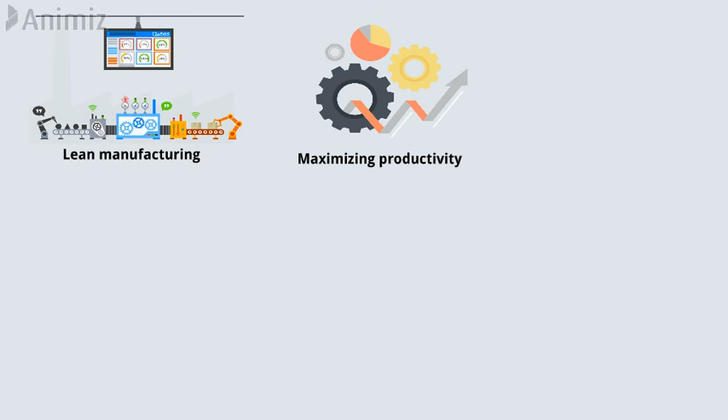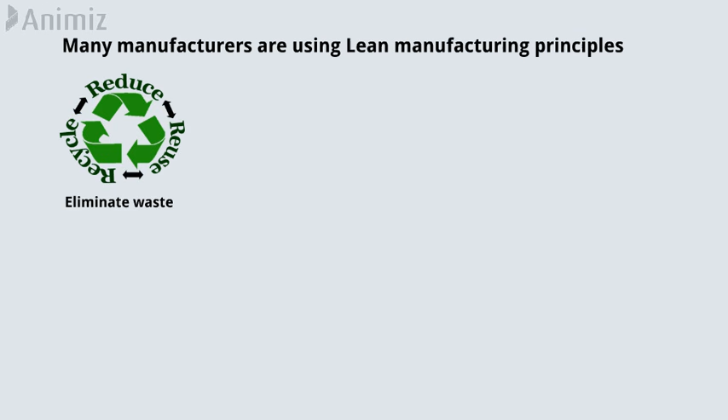Let's start the video. Lean manufacturing is a production process based on an ideology of maximizing productivity while simultaneously minimizing waste within a manufacturing operation. Many manufacturers are using lean manufacturing principles to eliminate waste, optimize processes, cut costs, boost innovation, and reduce time to sell in a fast, volatile, and ever-changing global marketplace.

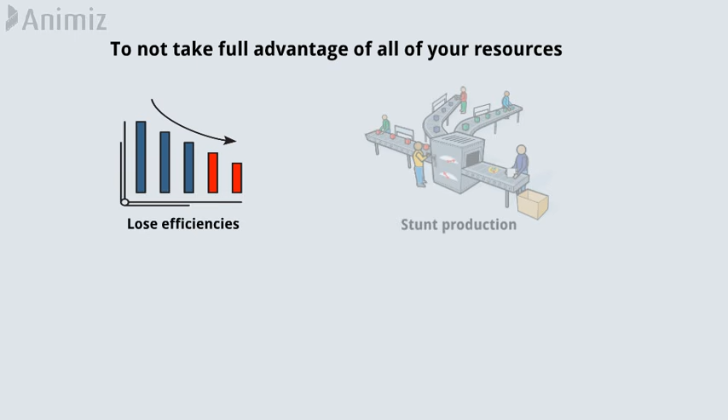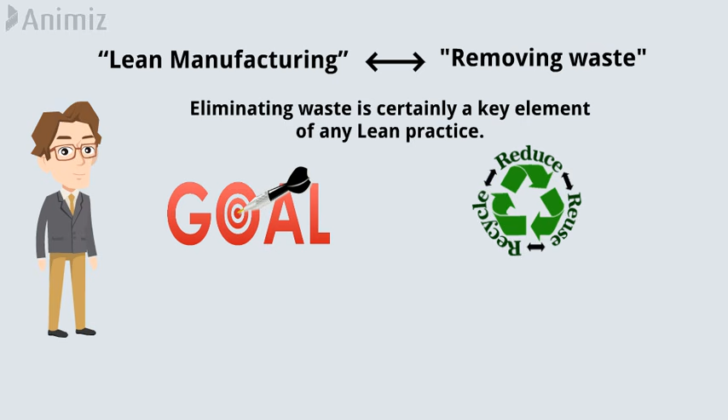To not take full advantage of all of your resources is to lose efficiencies, and in so doing, stunt production. For many people, the phrase lean manufacturing is synonymous with removing waste, and eliminating waste is certainly a key element of any lean practice. But the ultimate goal of practicing lean manufacturing isn't simply to eliminate waste, it's to sustainably deliver value to the customer.

Some well-known companies that use lean include Toyota, Intel, John Deere, and Nike, etc.

Now come to 5 principles of lean manufacturing. A widely referenced book, Lean Thinking, Banish Waste and Create Wealth in Your Corporation, published in 1996, laid out 5 principles of lean, which are referenced as core principles in many fields. They are value, the value stream, flow, pull, and perfection. Let's discuss each principle separately.

1. Value. Value is identified from the perspective of the customer, and relates to how much they are willing to pay for products or services. This value is then created by the manufacturer or service provider, who should seek to eliminate waste and costs to meet the optimal price for the customer while also maximizing profits.

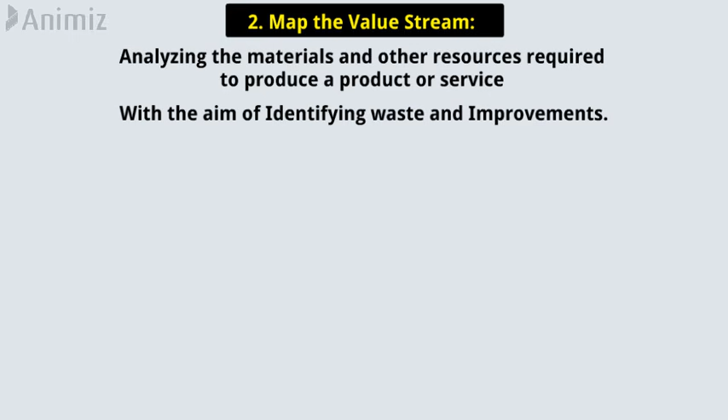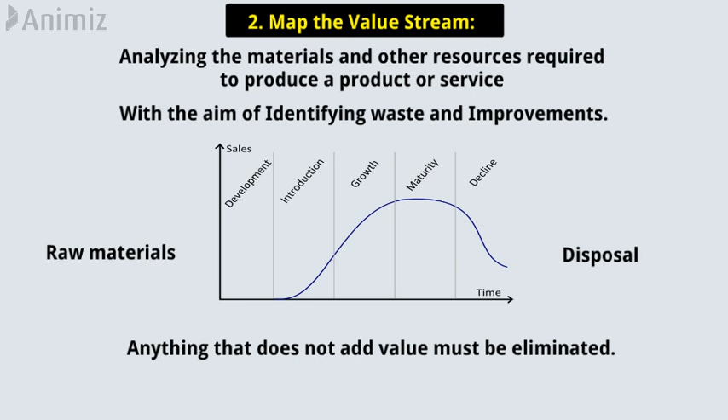2. Map the value stream. This principle involves analyzing the materials and other resources required to produce a product or service, with the aim of identifying waste and improvements. Value stream mapping comprises the product's entire life cycle, from raw materials through to disposal. Anything that does not add value must be eliminated. I have discussed the product life cycle in another video, check the video in the description.

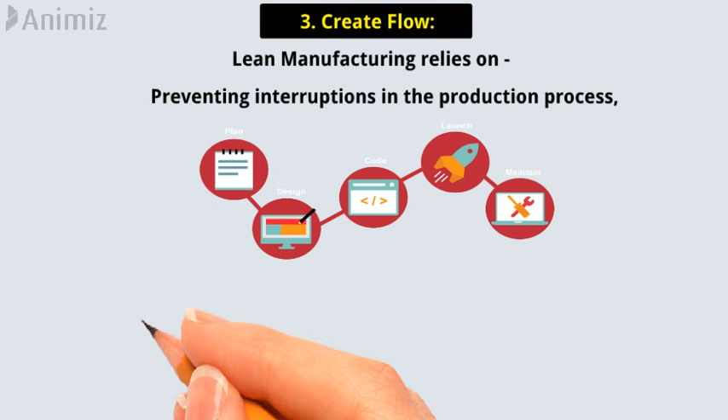Number 3. Create flow. Eliminate functional barriers and identify ways to improve lead time. This ensures that processes flow smoothly and can be undertaken with minimal delay or other waste. Lean manufacturing relies on preventing interruptions in the production process, and enabling a harmonized and integrated set of processes, in which activities operate in a constant stream.

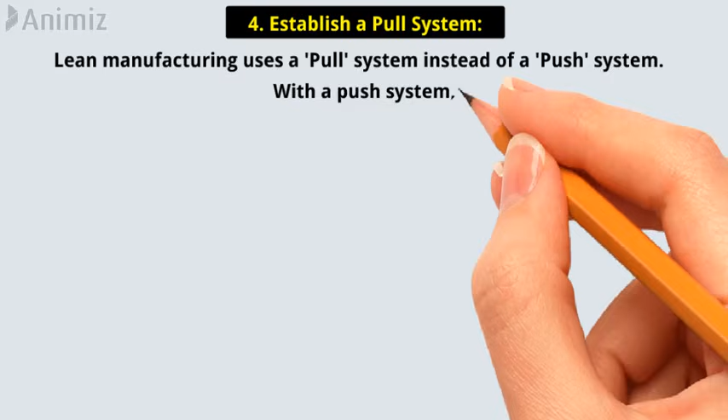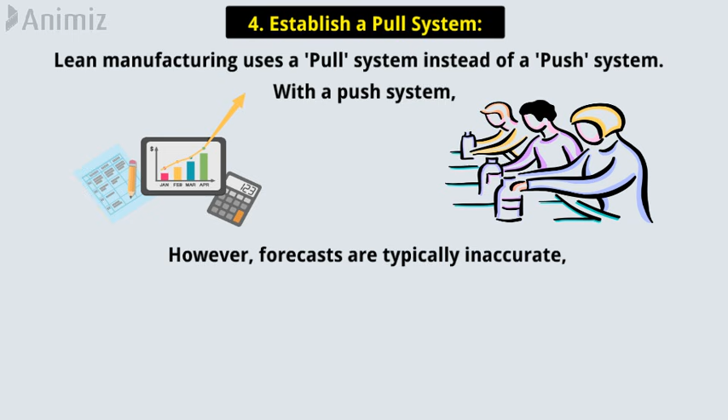4. Establish a pull system. Lean manufacturing uses a pull system instead of a push system. With a push system, inventory needs are determined in advance, and the product is manufactured to meet that forecast. However, forecasts are typically inaccurate, which can result in swings between too much inventory and not enough inventory. This can lead to additional warehousing costs, disrupted schedules, or poor customer satisfaction.

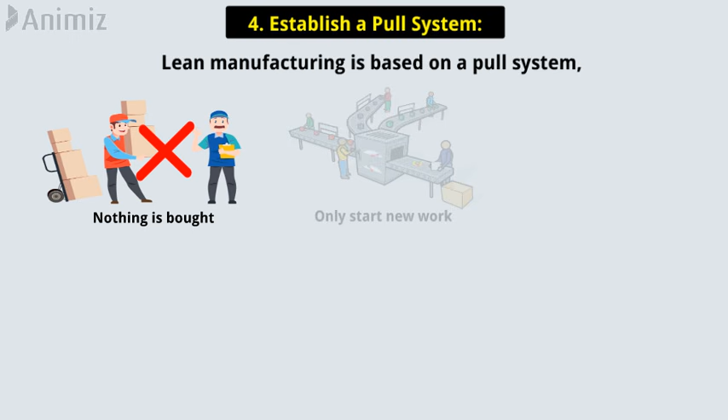Lean manufacturing is based on a pull system in which nothing is bought, or you only start new work when there is a demand for it. Pull relies on flexibility and communication.

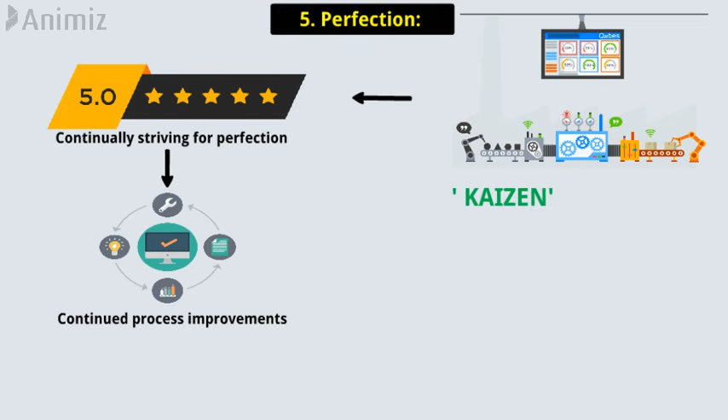5. Perfection. Lean manufacturing rests on the concept of continually striving for perfection via continued process improvements, which is also known as Kaizen, as created by Toyota Motor Corporation founder Kiichiro Toyoda. It involves targeting the root causes of quality issues, and ferreting out and eliminating waste across the value stream.

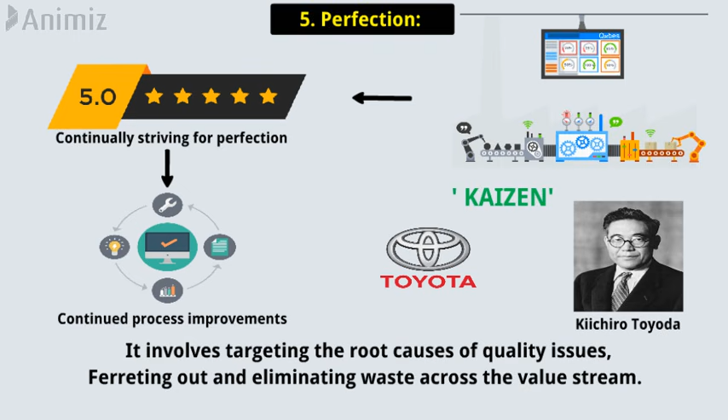8 wastes of lean manufacturing. The lean manufacturing framework, originally developed by Taiichi Ohno for Toyota Motor Company, has applications across every industry today. The original 7 wastes identified by Ohno have expanded to include one more related to an organization's employees. You can easily recall the 8 wastes of lean by using the acronym DOWNTIME.

D stands for defects: products, services or information that are incomplete or inaccurate. O, overproduction: making something earlier or faster than needed, or making more than what is needed.

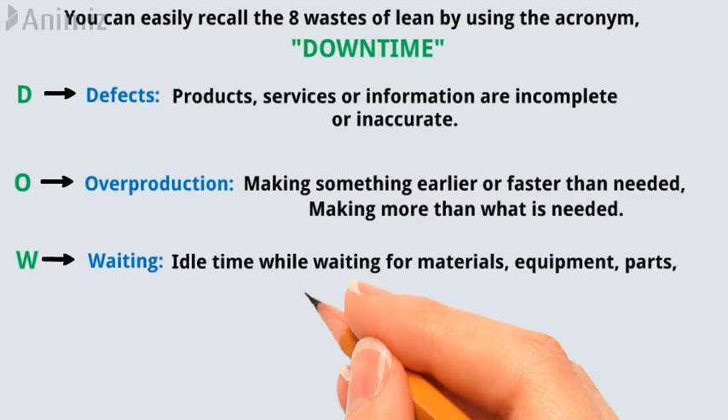W, waiting: idle time while waiting for materials, equipment, parts, people, or information. N stands for non-utilized talent: not fully utilizing the experience, skills, knowledge, or creativity of your team.

T, transportation excess: the unnecessary movement of products, equipment, or materials. I, inventory excess: overaccumulation of stock beyond what is necessary to serve the customer. M, motion excess: any movement by the team that is not of value to the customer. E, excess processing: any additional steps in a process that do not add value to the customer.

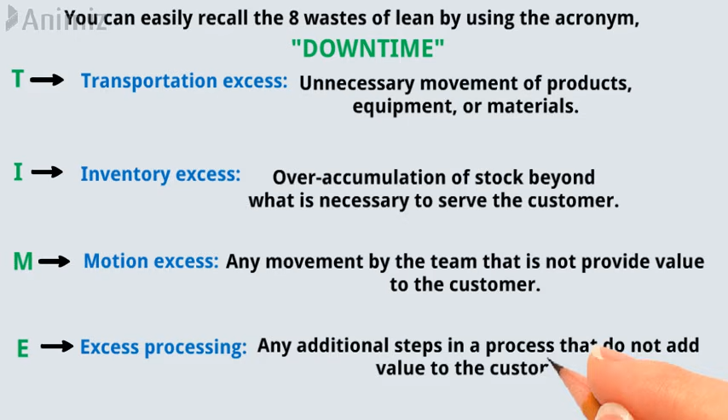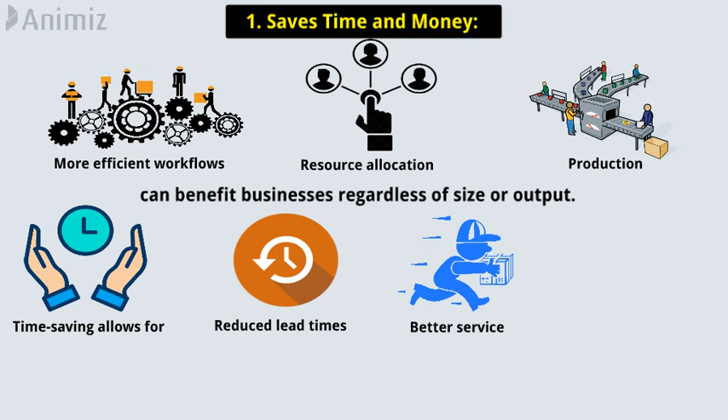Let's move on to advantages of lean manufacturing. Number 1, saves time and money. More efficient workflows, resource allocation, and production can benefit businesses regardless of size or output. Time saving allows for reduced lead times, and better service in providing products quickly to customers, but can also help save money by allowing for a more streamlined workforce.

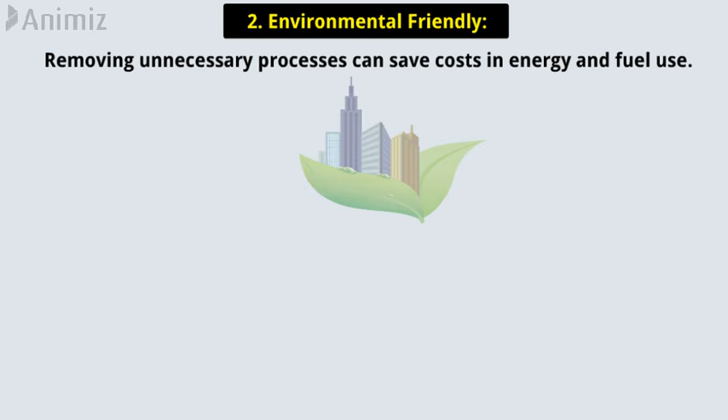2. Environmental friendly. Removing unnecessary processes can save costs in energy and fuel use. This has an obvious environmental benefit, as does the use of more energy-efficient equipment, which can also offer cost savings.

3. Improved customer satisfaction. Improving the delivery of a product or service, at the right cost to a customer, improves customer satisfaction. This is essential to business success, as happy customers are more likely to return or recommend your product or service to others.

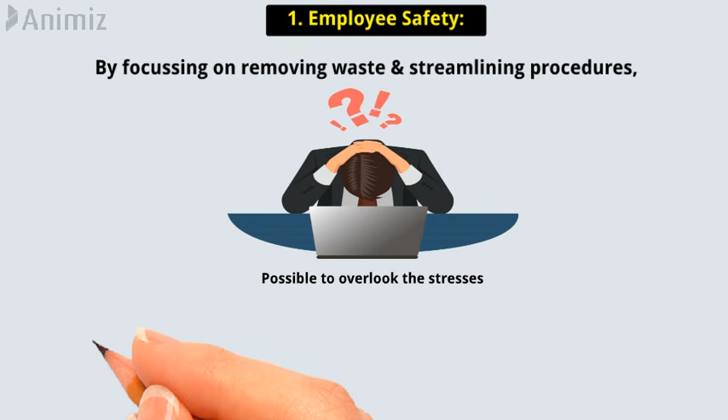Disadvantages of lean manufacturing. 1. Employee safety. By focusing on removing waste and streamlining procedures, it is possible to overlook the stresses placed on employees, who are given little margin for error in the workplace.

2. Stops future development. Lean manufacturing's inherent focus on cutting waste can lead management to over-focus on the present, and disregard the future. However, these may be important to a company's legacy and future development.